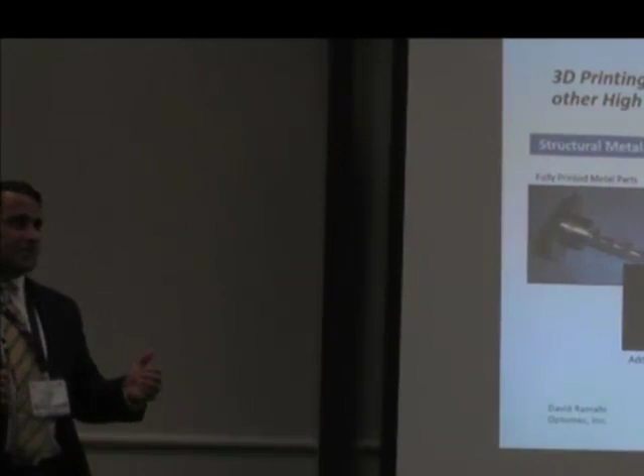Very familiar with Optomec and the kinds of solutions that we're working to deliver. Even with that as a preface, one of the things you have to keep in mind about our solutions is we have very broad capabilities. What we've really strived to do in the last couple of years is find those quote-unquote killer applications where

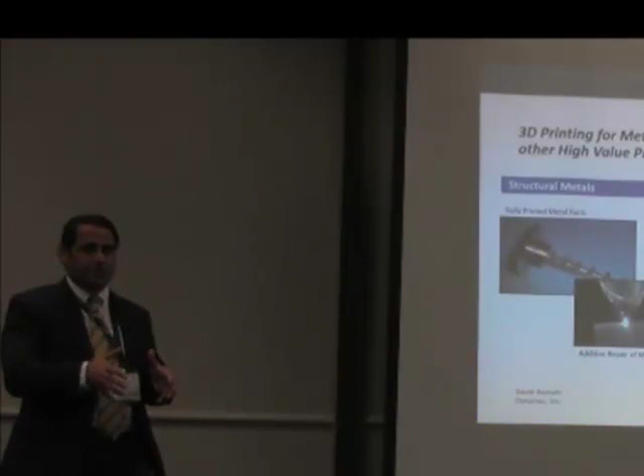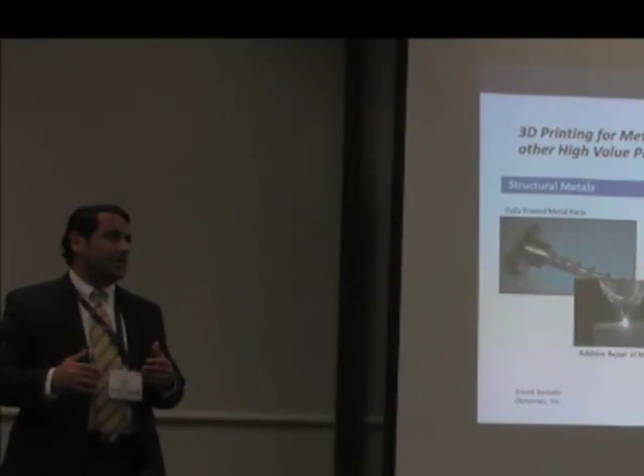there is a near-term, high-volume production opportunity. So I'm going to talk a little bit broad, and then drill down on some things that we're seeing going into real high-volume production in the very near term. They're very exciting applications and opportunities that I think in many cases are underappreciated by people in the 3D printing community. So I'd like to call your attention to them. Hopefully it will open some eyes.

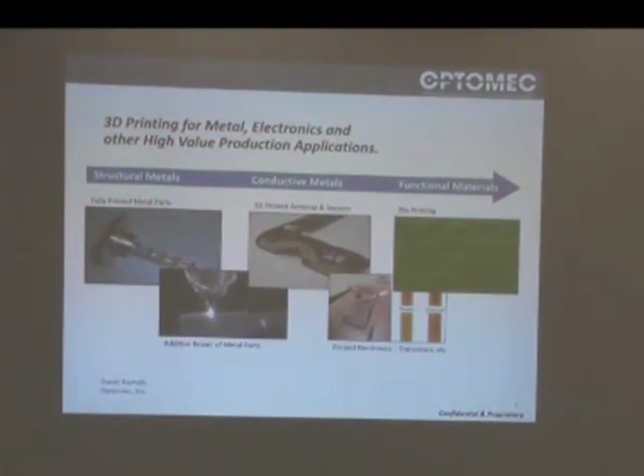As a starting point, I'd highlight the history of Optomec in terms of its ability to print functional materials. Our roots actually come from printing structural metals. At the outset, our vision was very much to print a full component in metal using 3D printing. In our case, that's not powder bed technologies, it's quote-unquote blown powder technologies. But our initial solution was around printing a full component in metal.

As we engaged the market that was interested in those kinds of solutions, the one thing we found is there was a lot of interest in the community of high-value metal component users in actually restoring old components, every bit as much as printing new ones. In fact, in their minds, if you could revive an old part, it was actually a lot cheaper than building a new one from scratch.

So our technologies originated with printing full components in metal. They transitioned to also being able to print metal on metal, a lot like what Bill was describing in terms of almost hybrid processing, where you could come in and restore a wear area. Our activities in printing structural metals led us down the road to actually printing conductive metals. So when we talk about being able to print metals, it's not just structural metals, it also includes wear metals, and conductive metals.

The activities in conductive metals got us down the road of being able to print a much broader set of materials, including those relevant for electronics applications. So while the two pictures on the left show structural metals, the picture in the center top shows printing of conductive metal producing a three-dimensional antenna for a smartphone application. Just below that, because we can print not only metal but other functional materials, you're seeing examples of fully printed transistors. That's a four-material, four-layer structure that is much more than just metal.

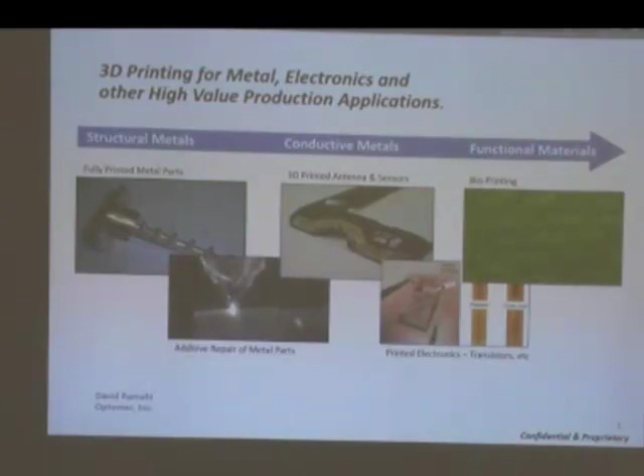It's a lot like what Bill was talking about in terms of expanding the material set in order to do new things. Printed transistors on flexible substrates is something that's pretty enabling. And then finally, because of the breadth of capability of the technology, we can also do general bioprinting.

Just to give you a little background on Optomec, because you may not be so familiar with us as a company, we've always focused on production-grade materials and production-scale applications. That focus has actually been fairly successful for us in the market. We have more than 150 installations. Many of those installations are only one or two systems, but some are as many as 4 or 5 systems, and a lot of our customers are interested in scaling to high volume production.

Some of the companies we're working with, more so from the industrial sector, are shown here in their logos. If you take it back to our technology portfolio, we have more than 35 patents issued, all very young by relative standards, and we have another 50 plus or so pending.

One of the things that's interesting, if you take a look at the application and market areas we focus on, is they're not always the ones considered to be part of 3D printing. So 3D printing is one of the markets we're looking at, but in fact our solutions, in particular with respect to printed electronics, also play in the realm of industrial Internet of Things, and other application areas you don't normally associate with 3D printing.

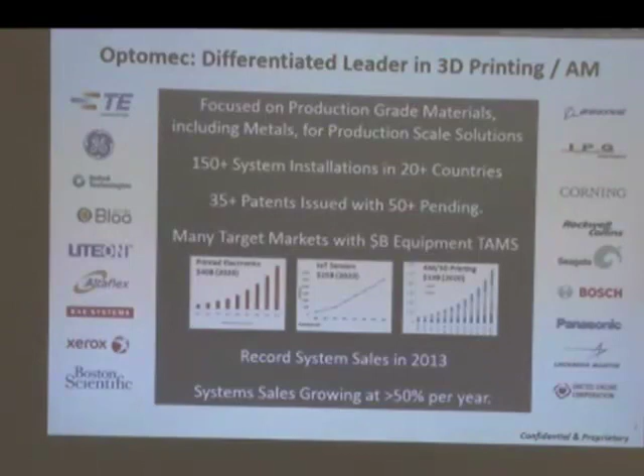But the reality is when we make a 3D printed antenna, that antenna can be used for ubiquitous communication associated with Internet of Things. That kind of work has actually been sort of successful for us from a business standpoint. Sales are growing, business is good in that respect.

What's interesting, I think, about Optomec solutions is we don't really focus in that plastic realm, which seems to dominate 3D printing. We actually focus on these sets of functional materials, starting with structural metal and moving on from there. That focus on production-grade materials is what's opened the door for us to production-scale applications. I'll give some specific examples as we go through.

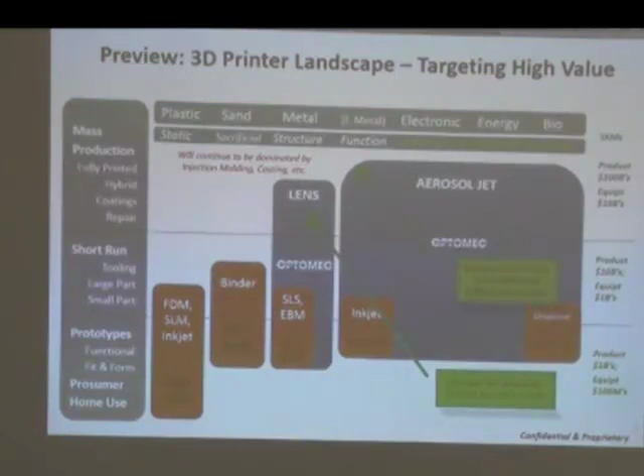This is another part of the message. Given that we focus on production-oriented applications, that actually allows us to address the entire product life cycle, starting with product development.

We printed sensors on them, placed components on them, interconnected the components, attached them, drew traces, etc. That was done in more of a product development mode, much like many 3D printing systems are used.

What's different about us is our ability to support the entire product life cycle, so we have the ability to transition into full manufacturing. One of the things that enables that is that in a lot of the applications we're involved with, we're actually printing a relatively small amount of material. For instance, the amount of material we print on that set of glasses is really small.

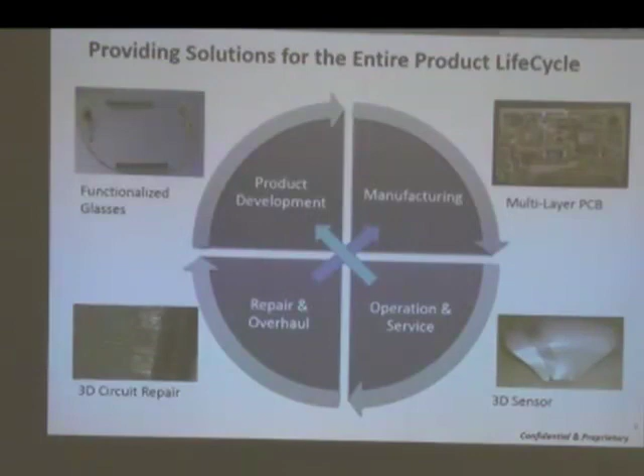From a technology standpoint, I'm not going to go into a lot of detail—I just want to highlight some of the differentiation. We have two technology lines. One is used for printing structural metals, which can be either full parts or adding material to an existing part to repair it or put a wear surface on it.

The other technology is used to print electronics, energy materials, biomaterials, etc. What's really unique about our two technology lines compared to other printing technologies is the breadth of materials we can support—it's not just metals, it's also insulating materials, semiconductor materials, resistive materials, biomaterials, etc.

The range of feature sizes we can print is as small as 5 microns in some instances, and as large as—we have a system that supports a work envelope of 3 feet by 5 feet by 3 feet. So really small and really big at the same time.

In terms of the way the process works, what we do that's quite unique is you can basically print in open space—print in 3D onto an existing component—whereas most people are working with powder beds that obscure the part and prevent you from printing on a pre-existing component.

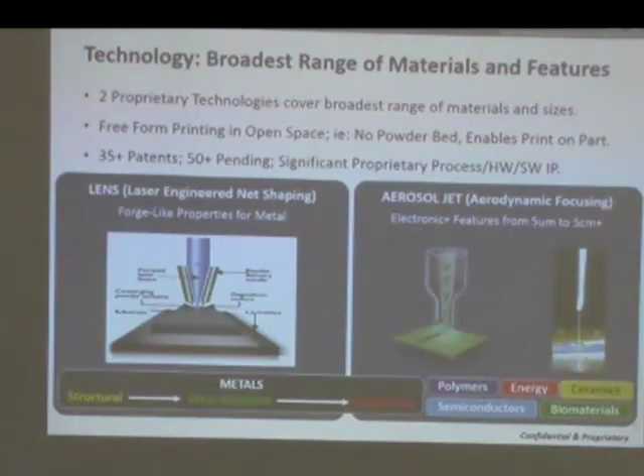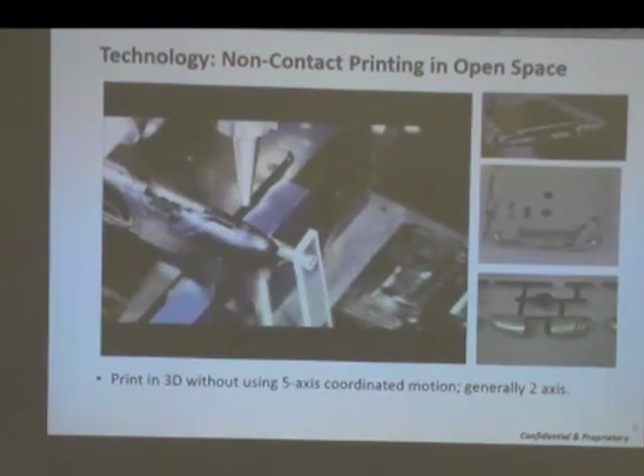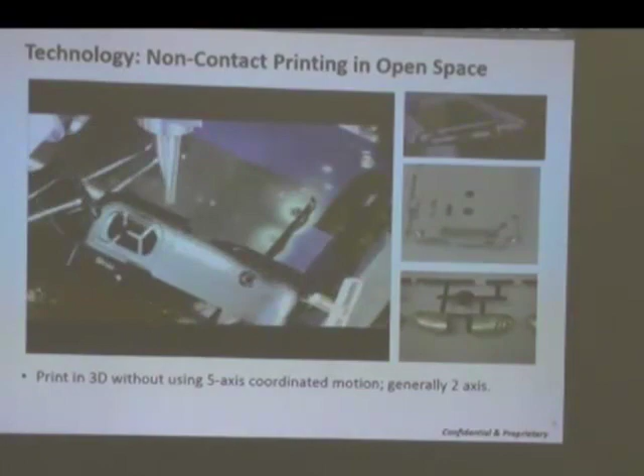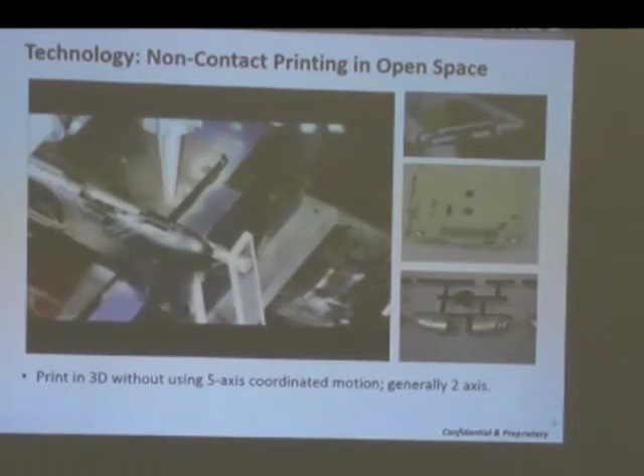We're basically printing a three-dimensional antenna in open space. Forget the binder clip for a second, but that actually indicates one of the benefits of our technology: you can have a variable standoff distance and a variable angle of incidence. You don't have to tightly control the proximity of the head to the part. It's very, very flexible in that way.

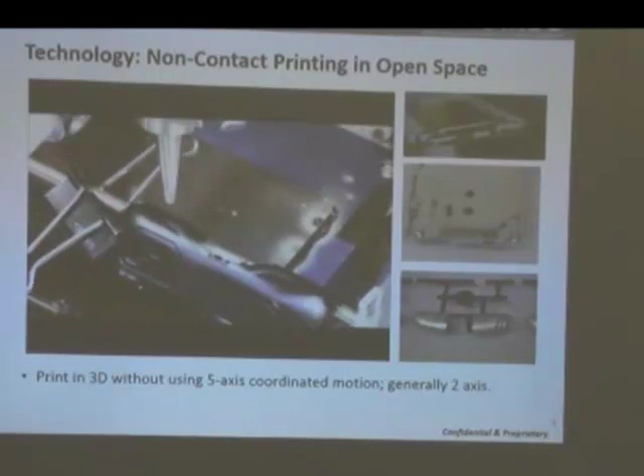But you can actually see we're printing metal—we're effectively spraying it in a highly focused way. That's what allows us to print in 3D space onto an existing component, and that works for both of our technologies: our printed electronics technology as well as our structural metal technology.

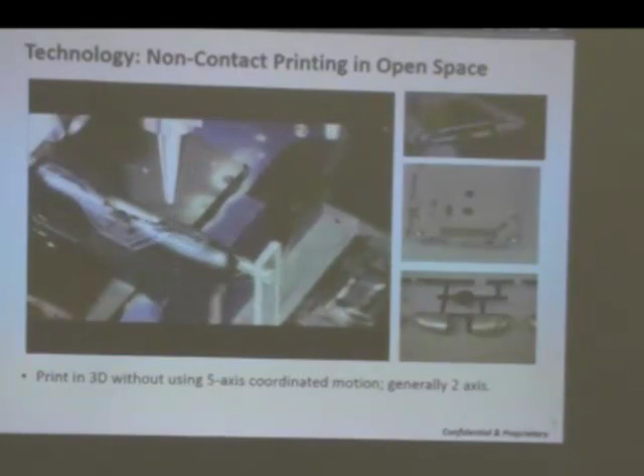While that's nice in the lab, where it really gets interesting is the ability to do it in high-volume manufacturing. Our approach for addressing throughput and cost requirements in production is to do multiplexing. This is an example for 3D printed antenna for smartphones.

We basically have four heads operating simultaneously, printing on four separate parts. In this case we print roughly four antennas on the front side, and then on the back side we place the contacts.

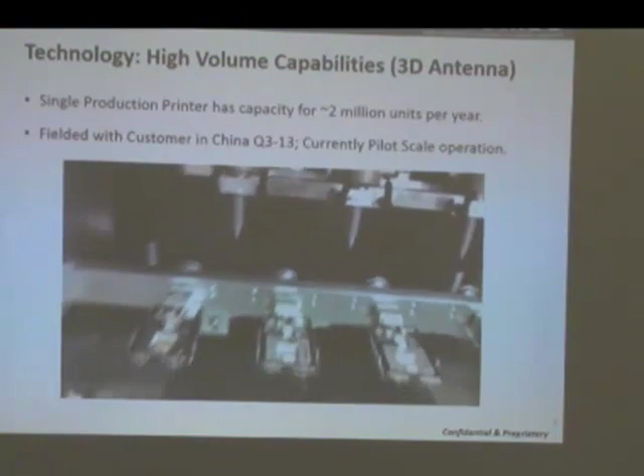This system, with this multiplexing approach, is able to do roughly 2 million units per year. That's relatively high throughput, and from a cost standpoint it's on the order of 20% less expensive than current methods of making antennas for smartphones. So we think this is quite unique—we have a production scale solution that can be cost effective in the real world.

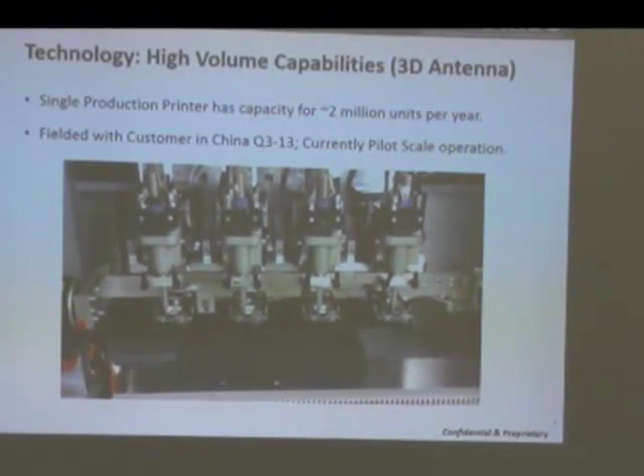Real quick recap of the products—it kind of gets back to that product lifecycle slide. We have two lines of technology represented by two product lines, with solutions for people working in R&D and product development mode, solutions for people working in low volume production, and likewise solutions for people working in production.

One thing we do that's a little different is we don't just sell standalone systems. We've embraced an open architecture approach where, in addition to selling a full system, we also make available an enabling module you can integrate onto an existing platform. For example, for both the structural metal solution and the printed electronic solution, you can get something we call a print engine and put it on your own motion platform.

Richard will talk a little about the LENS print engine—a modular approach to printing structural metals in 3D that you can integrate and retrofit onto an existing machine tool. So you can take a CNC machining center and add this to it, giving you a hybrid manufacturing capability: a system that can do both subtractive and additive processing.

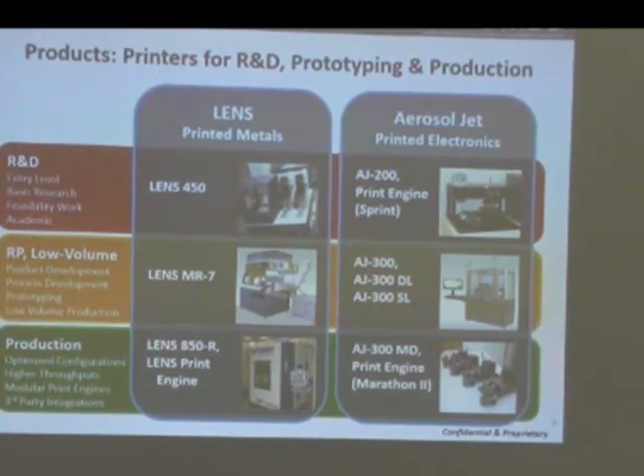This is just a little more detail—on the right-hand side are the puzzle pieces that go into the a la carte menu for a structural metal print module. There are some obvious things you need: a powder feeder, a laser, a deposition head. But there are other elements that make it attractive, including somewhat sophisticated software that allows people to create tool paths for 3D printing in structural metal.

We also offer optimized recipes. So if you want to print stainless steel or titanium, we give you the process instructions that enable that, because we've already developed those capabilities.

We think this is significant because it dramatically lowers the price point for doing structural metal printing in 3D. It also has other advantages: taking advantage of installed machine tool assets represents a significant cost saving to the customer, and it gives a familiar working environment—someone familiar with the machine tool can now also do structural metal printing using the same user interface. We think this is significant, and we're seeing a lot of traction with this offering.

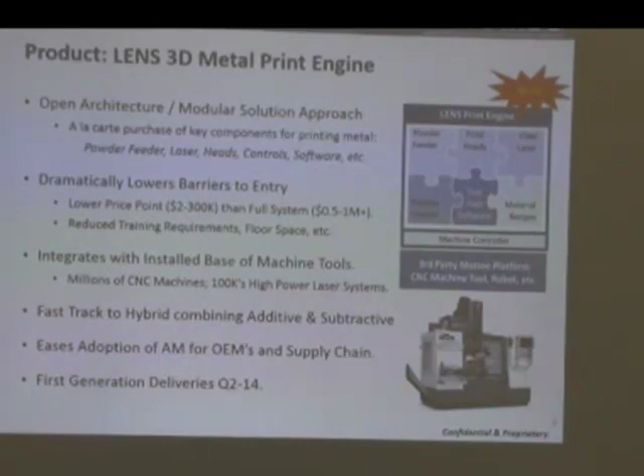If you pull it all together, what we're really trying to do is use 3D printing to support some of the major industry trends we're seeing. I mentioned before the idea of using 3D printed sensors to enable the industrial internet, where you can do in-situ health monitoring of components. That's something we're in the process of taking into production, and it looks very significant because it represents huge cost savings to the customer.

The printing cost is relatively low, but the savings are actually quite substantial. Also, the idea of doing the 3D printed antenna gets into the whole idea of embedded connectivity, where there are intelligent structures that can communicate back their status to the industrial internet.

Obviously also things like supporting the miniaturization of electronics—we can print in very fine dimensions, which allows people to make smaller circuit boards and do three-dimensional integration of semiconductor chips, etc.—things way outside the realm of what you think of in terms of 3D printing. And then finally, sustainment: the idea of being able to use a metal printing technology not just to make parts, but also to repair parts.

I think to underscore the point, we're not so much selling functionality as we are promoting a cost saving. Most of our customers, because they come from the production mindset, are interested in cost first and foremost. They don't care that it's 3D printing. They're really concerned with the fact that it ends up either helping them save money or it's actually cheaper versus competing technologies.

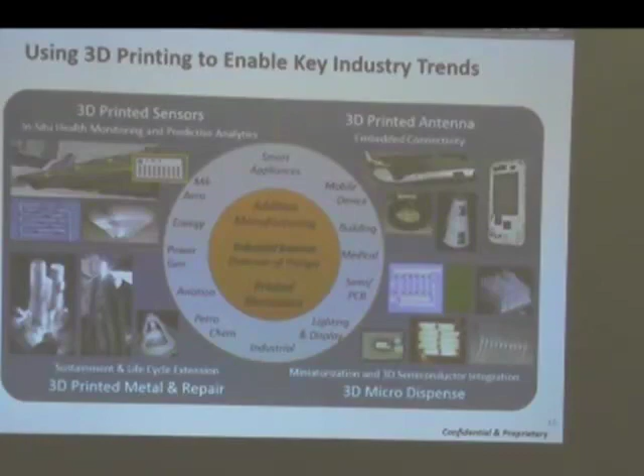I found this really interesting. It comes out of GE's reports on the industrial internet. I don't know if you had the time to take a look at this, but it's kind of easy to read because there's lots of nice pictures and charts in it.

They talk about this notion of things that spin. A lot of people don't think too much about things that spin, but things that spin happen to include the aircraft engine that helps bring us all to Detroit and hopefully get us home safely. It also includes things like the gas turbines used in power generation. There's a lot of these expensive, large systems predicated on a lot of spinning components.

Spinning components, as I mentioned, are somewhat expensive, but at the same time they suffer from wear and ultimately they fail. The whole notion behind the industrial internet, first and foremost, is to have sensing technologies that can tell you when a part's going to fail so that you know when to replace it. The math means that rather than replacing a component based on worst case planning, you replace it when it needs to be replaced. So if you extend its useful life by 50%, it's a massive cost savings.

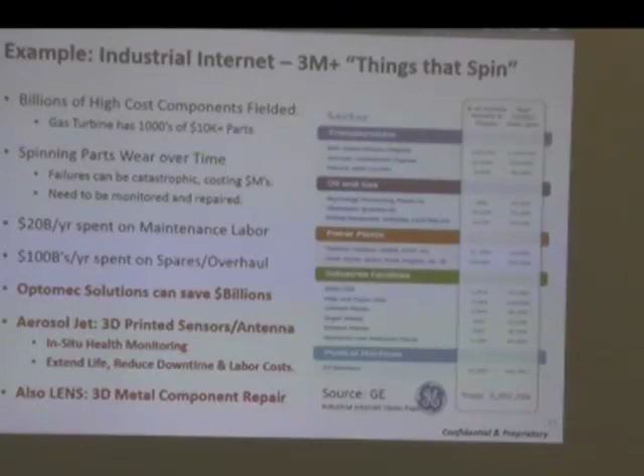The other interesting aspect of these 3 million systems based on things that spin is they need to be repaired. So our technologies are relevant to these major systems in a couple of different ways. One is in terms of sensing, so you can do in-situ health monitoring and know when to fix or replace a part. The other is to actually use these technologies to repair these high-value metal components.

Trying to bring it to a bit of a summary, the things that differentiate us in the 3D printing space that probably should be the takeaways. First and foremost, the technology we have is highly differentiated. It supports a very wide range of materials and material types, ranging from structural metal to electronics materials to life sciences materials, etc. Also the range of feature sizes we can produce starts at around the 5 micron level and goes up to the meter scale, which is quite differentiated.

Likewise, our approach to how we take these solutions to market is highly differentiated. We have this open architecture approach where you don't have to necessarily buy an entire system from us, you can buy just a print engine or print module. There's another aspect where we don't force the market to buy materials from us. They can, we're basically agnostic about the supply of materials. Our systems are very flexible in terms of the material types they can work with.

So if we're selling an electronic solution to someone, they can go to DuPont, who's already a reliable, trusted material vendor, and use their material in our system. That means the pricing of the materials is much closer to commodity pricing as opposed to a premium-based pricing model. As we engage production-oriented customers, the price of the consumable is actually pretty critical to them, as is the notion of having redundant supply. We think that's actually critical to ultimate success in a production realm.